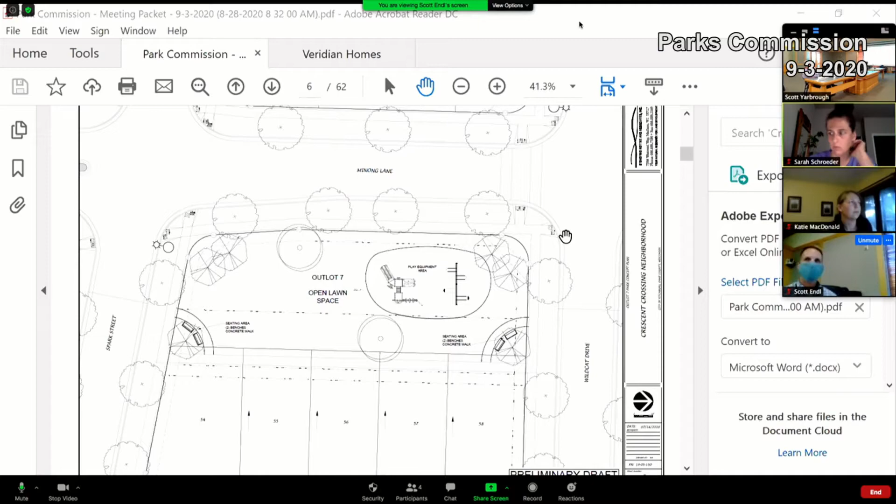Here's what we've got proposed for the play equipment. It says it's for 5 to 12-year-olds, but we asked them to put something in there to address the younger kids too. So we've got 2 different size slides, some different size climbing apparatus to really go towards that target client for the entry-level homes. We've got 4 swings, 2 for the older kids and 2 for the younger kids.

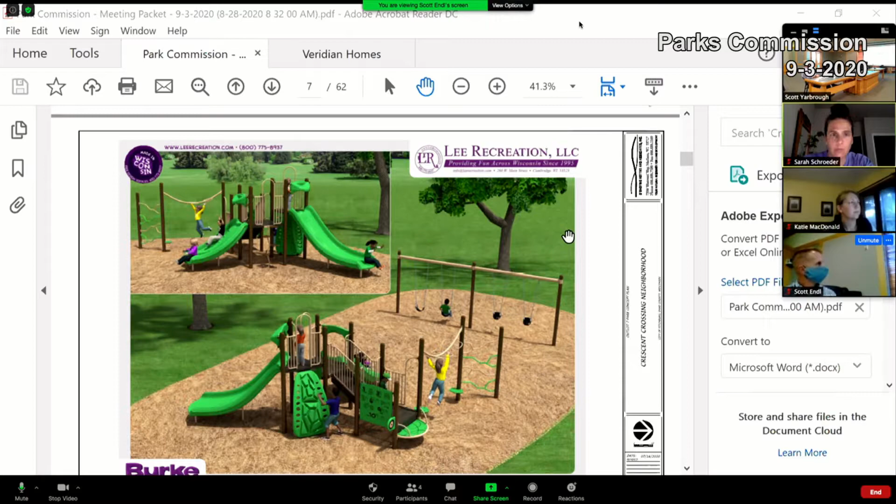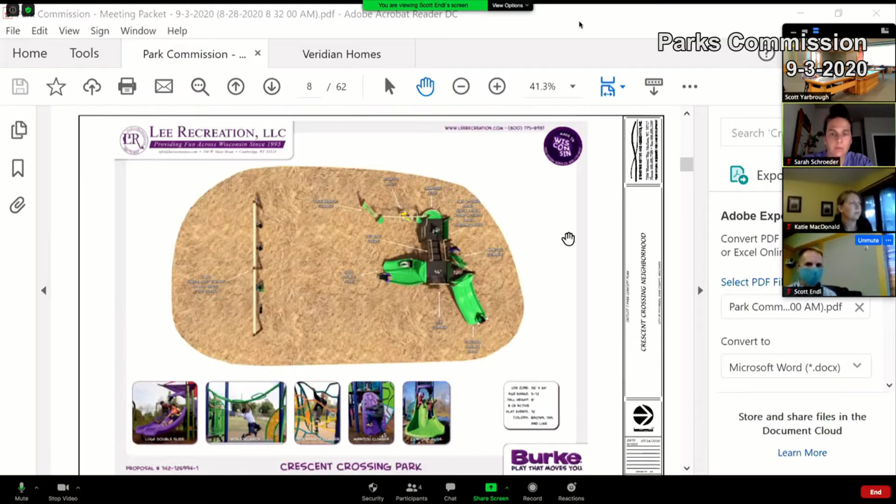Here's a plan view of it, as well as some pictures. Not quite the same colors, but it gives you a feel for what we're looking at for the playground equipment.

So looking at the dog park, we're looking at about an acre's worth of land. 1/3 of it would be for a small dog area, and 2/3 for a large dog area. Around the perimeter, we've got landscaping to screen the north and south neighbors, so they don't have to always see what's going on in the dog park area.

For perimeter fence, we've got a 4-foot vinyl coated fence. And then we've got some amenities planned in here, so it wouldn't be your typical dog park where it's just open land. There would be some play things for the dogs, and also some amenities for the people who have their dogs in there.

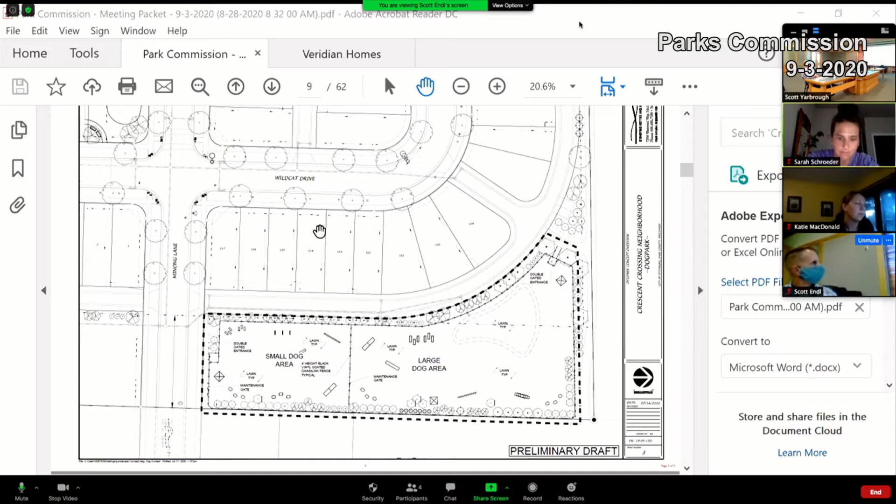So at the entry, we've got this double-gated sally port, where in the front we'd have some signage for small dogs. They go through that sally port, and right away we'd have seating amenities in the shade, so you'd have a bench with some type of shade structure, plus disposal receptacles so that we're taking care of the bad stuff that dogs bring.

Getting into some of these dog amenities, we've got some boulders, which do dual purpose. The dogs can climb on them, jump from boulder to boulder, but it also offers another seating amenity for the people that are in there. We've got a pre-manufactured climbing ramp that would go in here, so dogs can climb on or go underneath.

Up here, for agility, we've got some dog hurdles, and also a balance beam that could be put in, plus reusing some tractor or loader tires, again for climbing or going underneath. And then in the middle, we've got a tunnel, which would basically be a storm pipe that's buried, and the dogs can play underneath there and also go up over the top of it.

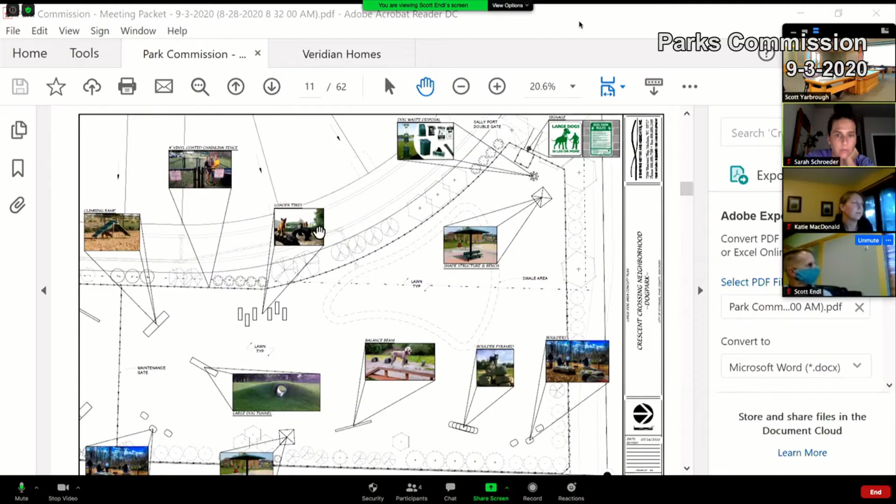In the large dog park, we've got some of the same elements, but at a bigger scale. So we'd have that balance beam again, probably a little bit bigger, and the storm pipe would be bigger, so they'd have a tunnel to go through and also climb over the top of it. We've got our boulders again, so they can jump from boulder to boulder.

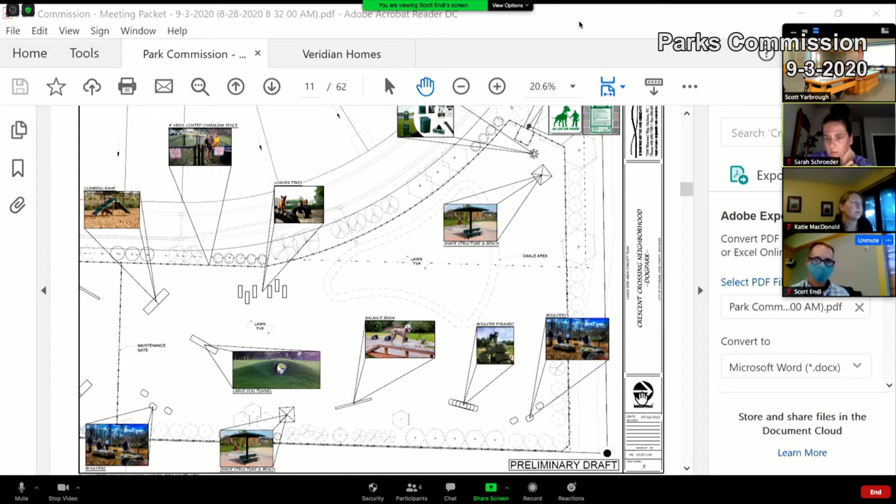Another seating amenity for the people, as well as 2 areas for benches and shade. One difference between the two here, we've got a boulder pyramid, which would be stacked boulders, about 4-foot boulders by 2 foot high into a pyramid, again another climbing and seating amenity. Up here is our double gated sally port with a sign for large dogs, and then we've got another waste receptacle here.

I think that covers it. I'll hand it over to Dan.

So what we're looking at is we've done some cost estimates for those 2 parks or 2 areas, totaling about $178,000 total between the two of them. That does not include any grading or seeding. That is all the improvements above ground, at ground and above.

What we're proposing is twofold. First, a reduction in our parkland dedication fee, basically equal to the area being used for the dog park and open space. Those 2 areas between outlot 7 and outlot 11 total about 55,000 square feet, or equivalent to about 19 units of park dedication fee, which would reduce the park dedication fee by about $82,000.

The other aspect we'd be requesting is the elimination of the park improvement fees for this plat, about $61,000. In total, that would reduce the fees by $143,000, which is still less than what we're putting in of the $178,000. The city would still be getting fees in lieu of for park dedication, $424,000 for this plat. So there's still a significant amount of dollars that Veridian would be writing out a check for, the Parkland dedication fee in lieu of, for the difference between 19 units and the total units for the plat.

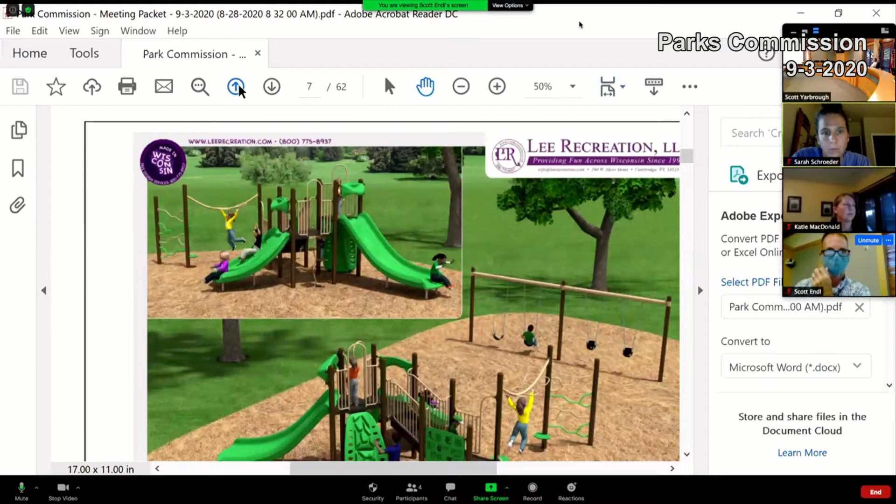Is that north half of it there, is that what you're currently working on? Is that like phase one of this area? Yeah, that's phase one. And there'll be three phases. So we would like to get this going, at least get the grass seed down this fall, so we have good grass growing up in the spring out here. That's our goal, so that's why we highlighted this section for it right now.

I'm not sure if I heard the details of what you said. Are the streets in this phase one, but the whole south part there is still open field, or what stage is this at right now? South is actually to the left. Yeah, that's south, right? Yes, that's south. And that's gonna be the solar farm, the O'Brien farm. Oh no, I don't mean across Lacy, I mean Spark Street East and Wildcat Drive.

So this area here is farmed right now. The stormwater management, that's what I mean, are improved on both sides. And this area up here, Matt, this area here, completing the streets and the utilities right now. We're probably gonna be paving in the next week or so. Right, that was my question. So there's not any housing starts in here just yet. Nope, not for another month or so.

Okay, then about the power line there, where the stormwater management and the dog parks, the two dog parks side by side, small and large, are proposed, that's underneath the power line. So who owns the land, and is there a lease on it from owner to user? It's owned by Veridian, but will be moved over to the association in time. But there's an easement over top to ATC for the power lines, and we have met with ATC, made sure they're good with it. Yes, we did talk to ATC about it.

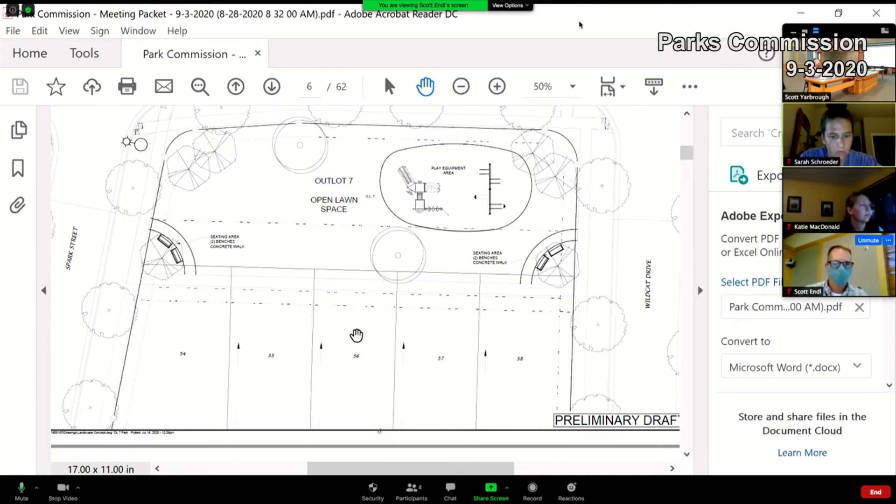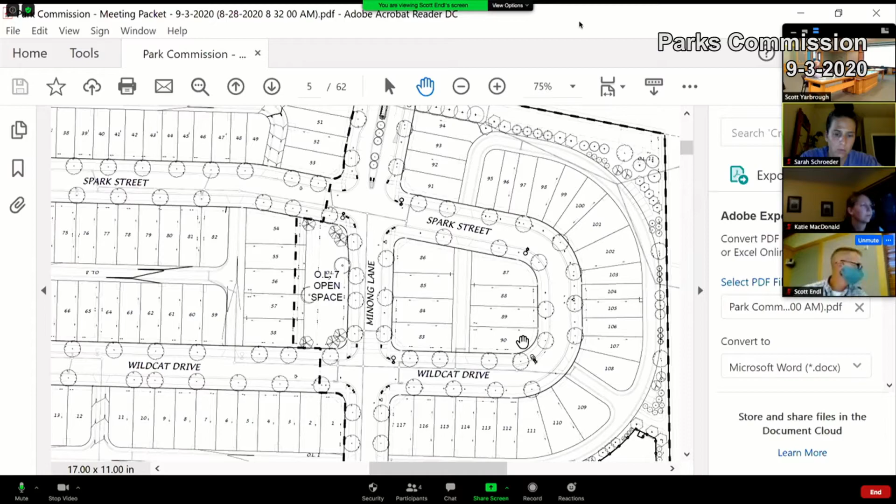Correct. So there's 5 lines going east-west along the north end of those properties. What are all of those 5 lines? Where's the property line? Are they easement lines? What are all those lines? So those are what we call green fronting lots. The front doors actually go out to a sidewalk that moves right up through here. So the sidewalk goes right here, the next page would be better, I think.

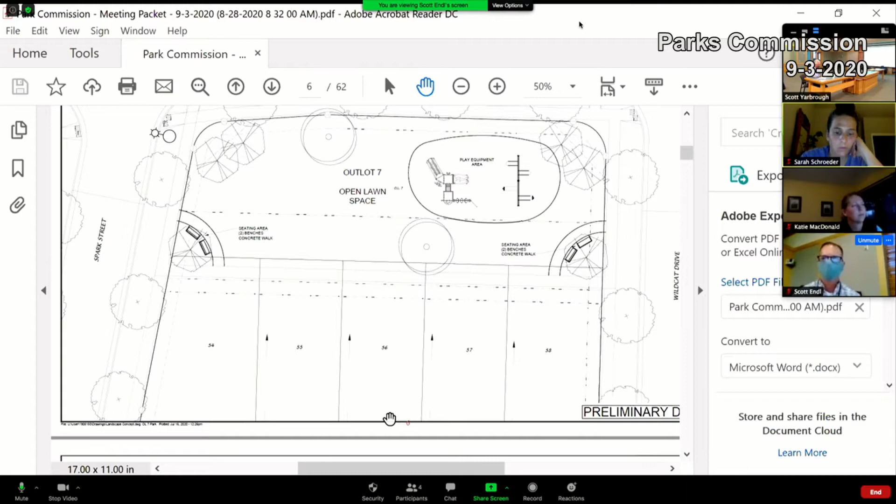So that kind of alleviates one concern that I had about properties that would be right up to the park boundary, but that's their front door, and there's a sidewalk out in front of the house, so that's kind of a good division between the private property, and then across the sidewalk is this park. We've done this numerous places in the last 20 years. It actually ends up being a very neat feature for these homeowners, because you'll see the homeowner sitting on the porch while their kids are out playing in the park.

I'm going to pause and see if anyone else has any other questions. Okay, go on, sir. Hi, can you get closer?

Yes, I shall. I'm just assuming that the city staff and council verifies the numbers that are provided, the financials, because we're not prepared here to say well all those numbers are accurate or are going to turn out to be fair. I would suspect Scott's checked them already, or he will be very closely. Yeah, the city administrator, others.

And now the dog park is in exchange for what might have been prairie. In the other developments surrounding it, underneath the power easement and the other developments, did they put any prairie in, or is it all parking lots? It's stormwater. It was stormwater basins. And then that's really it, it's all stormwater, the church and the neighborhood.

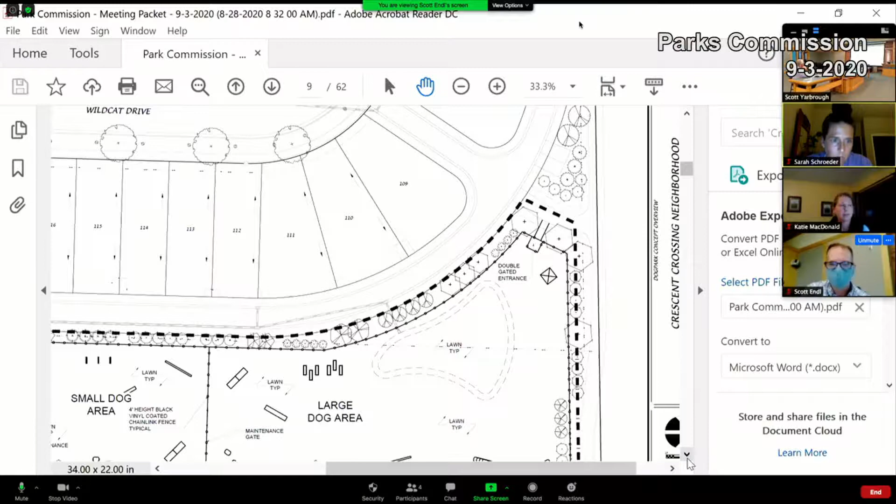So that is a low point in there, and that's where that pipe is that Dan mentioned, taking the stormwater out and to the southwest. Okay, I imagine you have to get the water out of there somewhere. I just wonder if that would be...

I've seen what dogs will do to muddy lawns, so I just wonder if that doesn't drain as well as we might want it to, if that would become a maintenance headache. That's something we can look into. That's all I have for questions.

Is that it? Oh, I'm sorry, go ahead Patrick. Okay, again about the water sources in the two dog parks, small and large, and even the small park in the middle here, I would suggest giving more serious thought to some kind of water source there. I am presuming that in the small people park in the center of the neighborhood, you don't have any water source there either, no drinking fountain. No, we had not planned a drinking fountain there whatsoever.

Okay, are the curbs and gutters and everything the same there as around the dog park area? Yeah. I really don't want to do that—drinking fountains are expensive, expensive to maintain, and there's issues with people, so I would try to avoid that in that park. Yeah, there are some city parks that don't have drinking fountains, but as far as the dog park, I think that needs a little more emphasis.

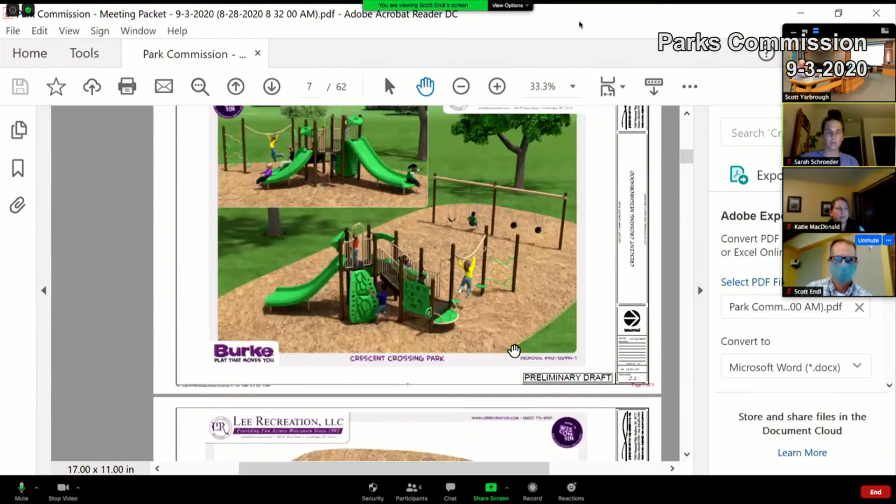One thing I would disagree about here, about the use of this dog park - this looks very interesting, you've got an obstacle course for dogs in there. I can see this being a draw to more than your Crescent Crossing or even North Stoner Prairie neighborhood, because the existing dog park is far south and way over east at Fish Hatchery and Irish. Anyone in the whole northern part of the city might want to stop in here, so it may be more popular than you're thinking, where you're thinking of just this neighborhood walking there.

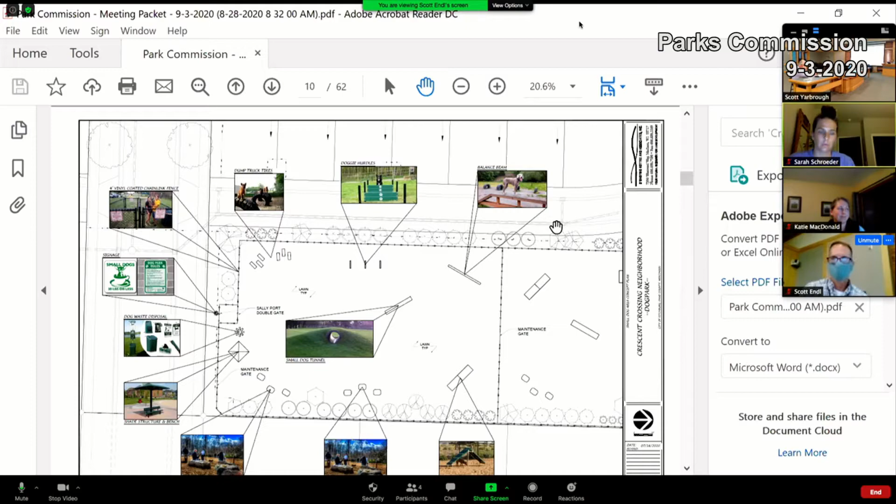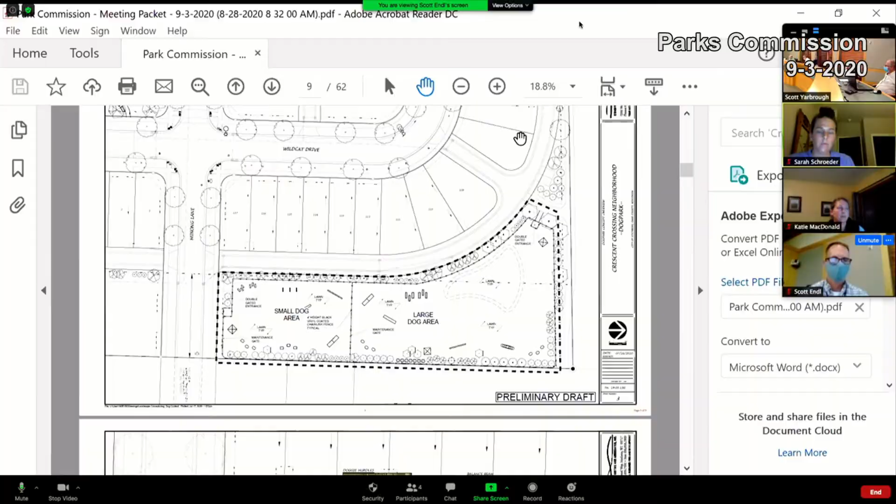I am also a little concerned on a couple things here. There's Minong Lane at the south end of the Small Dog area, and Wildcat Drive is the western border of this. Since Minong Lane going east and west is a main road through here, because if I remember right the Plan Commission kind of overruled the intended original difficult way to get through the neighborhood, and now you've got a straight east-west so traffic doesn't have to go round and round the blocks to get from here to there.

Does Minong Lane probably not allow parking along it? No, I believe there's parking on there. Okay, and it was always in the neighborhood plan. This follows the road alignment - it actually comes through and connects to the adjacent neighborhood.

I'm just remembering there was an early version where if you come in from Seminole, you come up and then have to go way around a block to get through to the east and all. Yeah, I think that was on the Stoner Prairie site. We'd never really proposed that here. Okay, I know this will go through a lot of iterations, right? Yeah, okay.

And so Wildcat Drive would also allow parking along there? Yes. Okay, I can really see cars driving in and parking here to use this, from anywhere on the north side of the city, or anyone who wants to use an obstacle course, because that kind of feature doesn't exist at the Irish Lane dog park. So I think this could be more popular than you think - it's only the second one in the city.

I do have a concern also. The entrance to the large dog area is way up there to the northwest - that's not bad. The entrance to the small dog area, though, is on Minong Lane, which I would assume to be the heavier traffic road going east and west through there. So that doesn't look like the best place to me to have the entrance in and out, when people have to go in and out and then get to their cars or even just walk home. I think it would be better if it was on Wildcat on the west side.

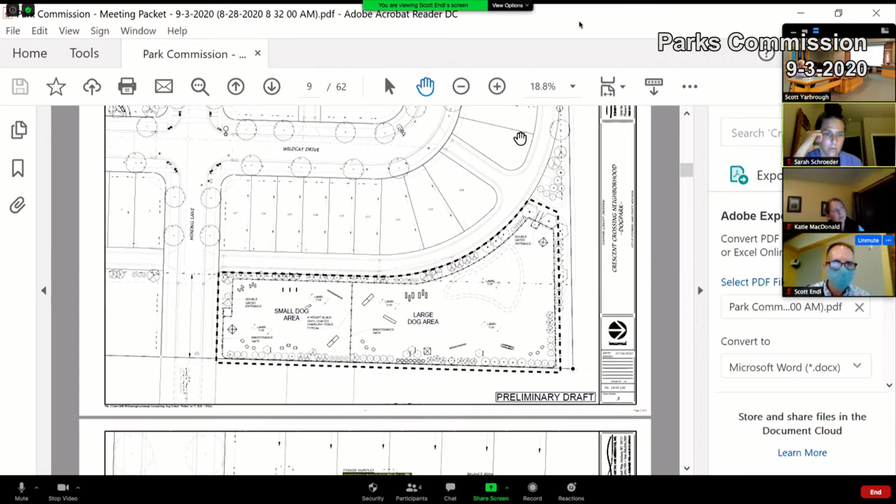Well, again, I'm trying to deter people from being lazy and driving here - I want them to walk here. This is an area where we've got 250 homes surrounding it, and these home sites are a little tighter than what was built in Fitchburg 20 years ago, so it's not as spread out. You've got more density, and you want people to walk to places - to Hop House, to the church, to the dog park. That's what we're trying to promote here. So yeah, if they want to drive, they can.

They can park on the road, on either of the roads if they want to. But the goal is that people in Crescent Crossing, North Stoner Prairie, Lacey and Seminole can all walk to this dog park, and that demographic serves a number of houses. There's more room, I think, than you realize. We're connecting to the sidewalk too, so the sidewalk will take you right to the entrance, won't it? Yeah, there's sidewalk on that north side of the roadway.

So it'll be pedestrian connected to the whole neighborhood here and also over here to Stoner Prairie. And then over here, there's a trail that runs east-west along the north side of our property, abutting Blackhawk Church, and then there's a trail that comes into here, which is where that comes off of.

So it's really truly meant for pedestrian, but I understand what you're saying, that it may be popular with people other than here. I'm not disagreeing that people from this neighborhood will walk here. I think that's fine, and I wouldn't want to do anything to deter them from walking. But someone from the houses way down on the south end driving over here, that is kind of lazy.

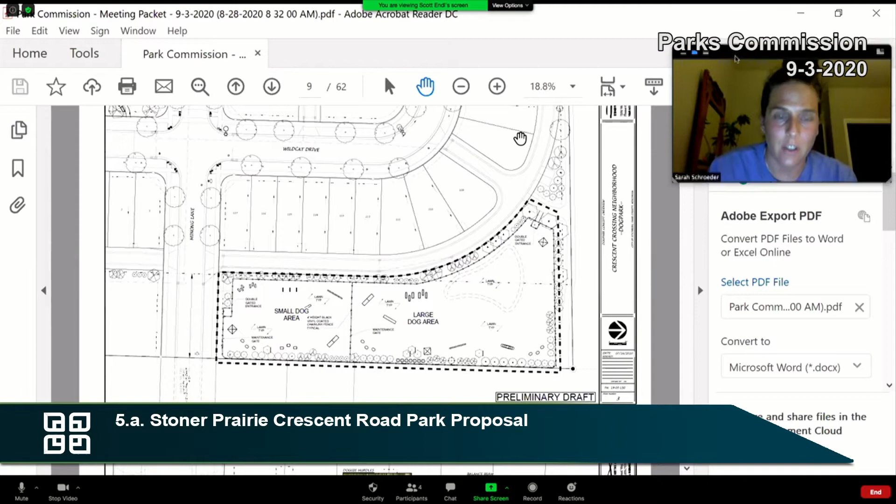And then for this communication specifically, I think, Scott, you sounded favorable for this. So I think you're our expert for how park funds work and how we can best keep our parks maintained. So I'd love to just confirm — am I hearing you correctly, Scott, that in your opinion this is a wise choice? It's something new, it's something we have in our plan that we should explore. So am I understanding correctly that you think it makes sense?

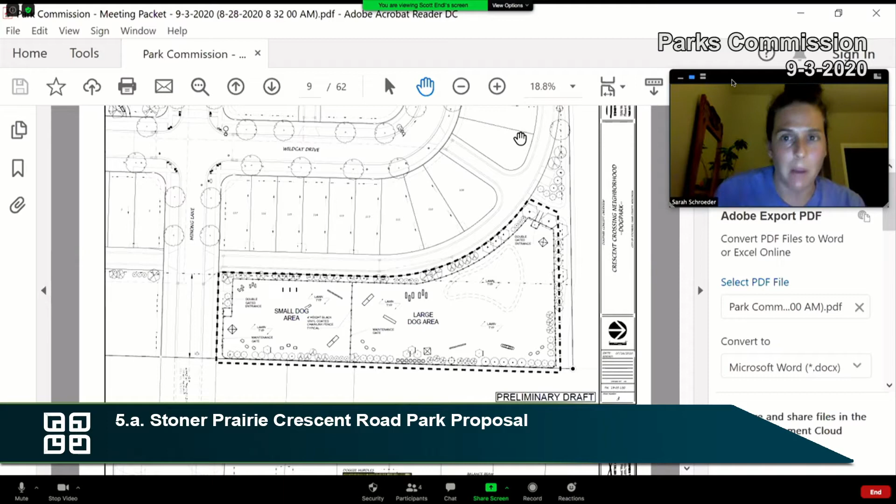It does, Sarah, and to me too — typically when we design a park, what do we always do? We always go to the neighborhood and ask for their feedback on what they would like to see in their park. And I would suspect that these gentlemen, in their development, this is what they're hearing from their customers, so they're willing to invest dollars to build it for their customers. So for us to decide, from my perspective, it's really most successful when the neighborhood drives it, and we need that help in deciding what the neighborhood wants in their park. The experts in the design, function, and amenities included in these parks really come from the development and the residents who are going to be living there.

I would echo both of those comments. We don't want to penalize them for putting in too good of an amenity, and that's kind of what I feel like we're sort of getting at here.

The parking is limited, but I would not want to give up anything else for more parking, certainly. I think people will walk to it. If people are going to drive with their dog, they'll go to a dog park that has parking, so this one isn't going to encourage driving to it. As for its size, I don't have any problems with that.

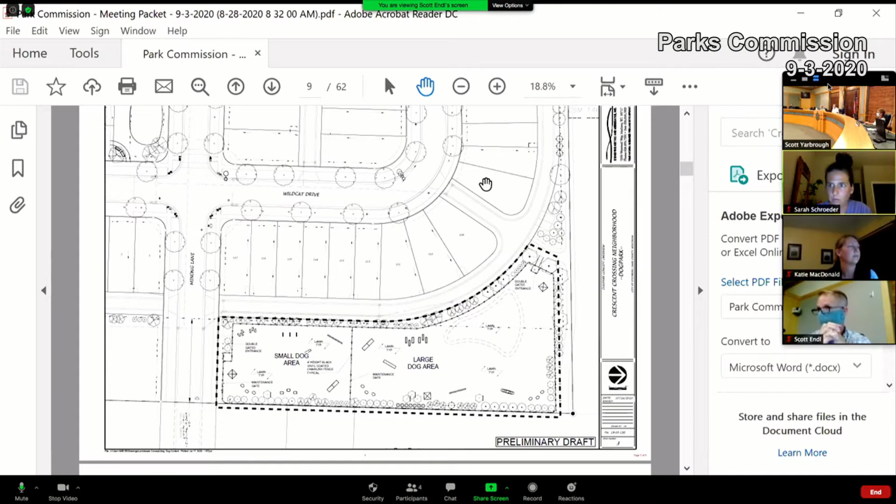There are ways to get there without having to walk on Lacy Road, if you want to take your dog on a long walk and check out that park. So I don't think there's any impediment to getting there on foot. The bike path will actually connect all the way through to the bike path that runs north all the way through Seminole Forest, through Seminole Glen to Seminole Pool. So a whole lot of area, those neighborhoods can connect via the path.

I would also point out that Blackhawk Church is just to the north of this, and there may be dual use of their parking lot along the pathway. Oh, that's a good idea. That's a very good idea.

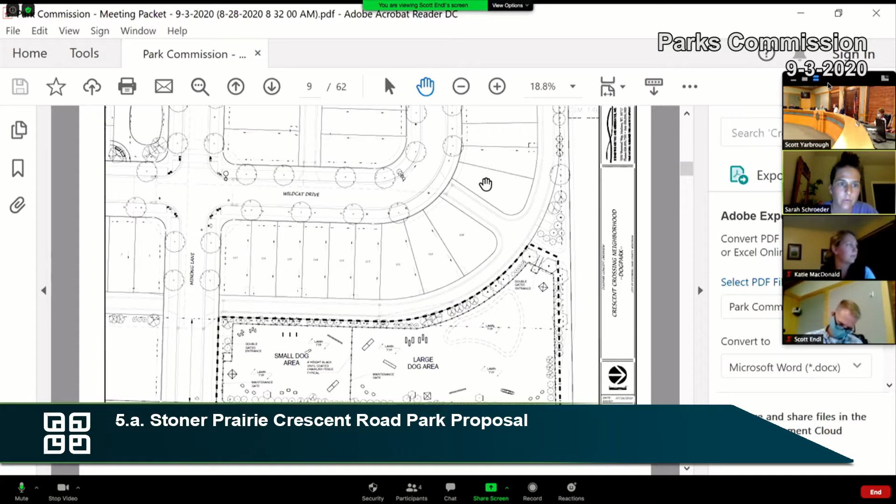Okay, do we have a motion? I'd make a motion to support what's being proposed and to research this further. Is there a second? Second. Any further discussion on the motion? Hearing none, voting on the motion, all those in favor signify by saying aye. Aye. All those opposed? Motion carried. Thank you, guys. Thank you very much, appreciate your time this evening.

All right, resolution R-145 authorizing acceptance of construction bid for pickleball courts at McGaw Park. Scott?

This is one of the final steps to get the construction of the pickleball courts at McGaw Park.

I would maybe just summarize the timetable. There was an addendum to this contract, so the timetable has changed a little bit because, as you recall, there is a water loop that needs to go in first. So we wouldn't have enough time to get this excavated, graded, and paved by the end of the year. So we did an addendum so the project will get graded and excavated and ready, but then they'll pave in the spring with substantial completion June 1, and the project will need to be completely done by July 1 of 2021.

What's nice about that too is it'll allow the base to settle over the winter, and if we need to fill in some areas, that'll allow for that opportunity.

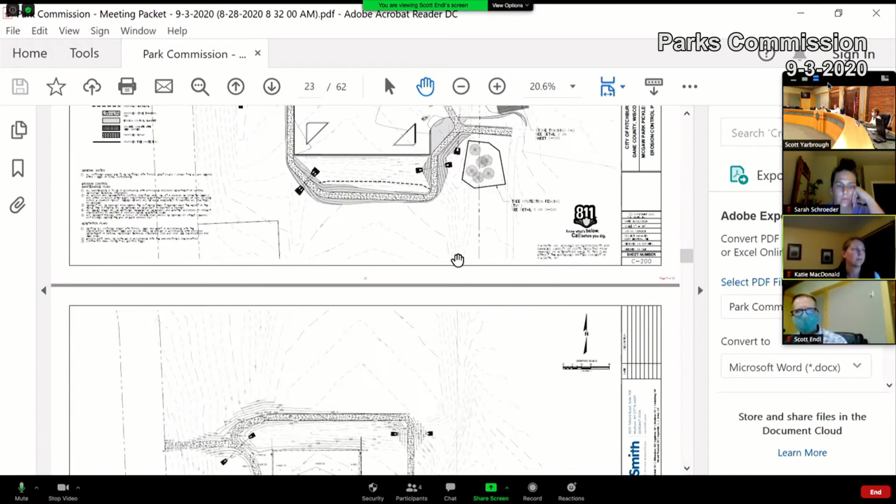I did include in your packet the pre-approval, which has the different funding sources, and the bid document, which gives you the design and the look of it. You can see it on the page that's showing now.

You see the culverts because you see all the topo lines on the north and south side, that's where the ditches are. So these paths will actually go into the southern athletic field and the northern athletic field, just for a bit of clarification.

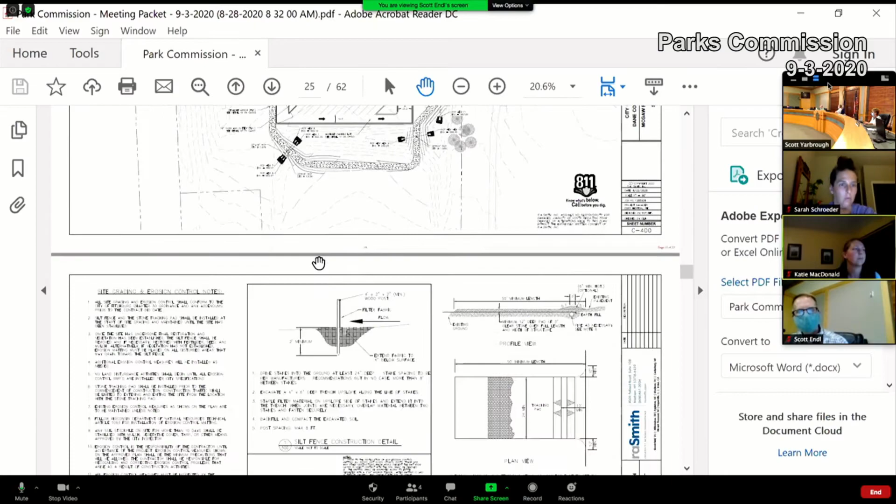I also wanted to include this bid tab. We received three proposals, and R.A. Smith is recommending Joe Daniels for $548,282. Here's the bid forms and things that were included in the packet for the council.

I also wanted to reiterate the funding for this. I can certainly explain that again if you need me to, but I wanted to provide a summary of both R12220, which was the water project, along with the pickleball courts, so everybody knows the funding and where the funding sources are coming from.

I also included the McGaw Park Master Plan. When we did this back in 2012, we were anticipating that we'd get some additional parkland to the west, and it calls for athletic fields on the north and south, with amenities in the middle.

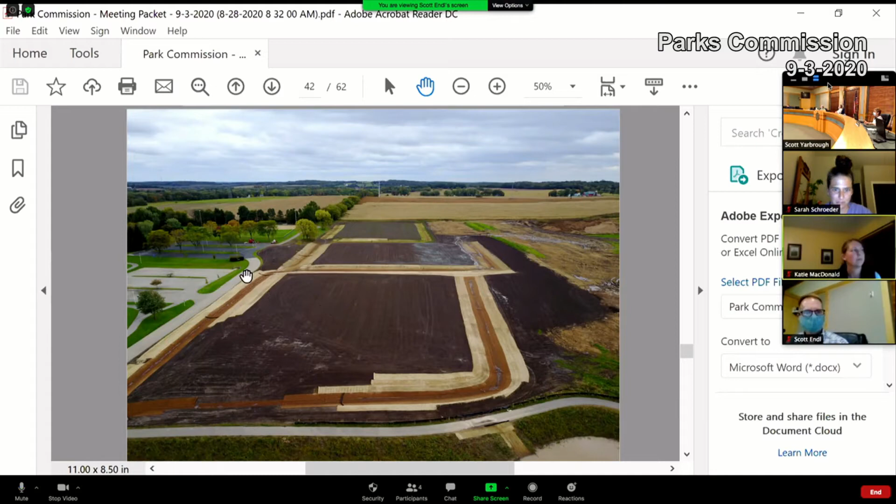I also included an aerial view so it gives you an idea: you come in here, then there, then the parking lot, and then the pickleball courts. There'll be a culvert here because the path will go along here and back up, and it'll do the same thing on top, so there's access to both the north and south playfields.

Are we looking east? We are looking south. Existing McGaw Park is over here to the east, and the houses and things are over here. So you'll come up the access road, come in here, then the pickleball courts, then the parking lot. The path will come over this, then on this side and up, and do the same thing on the other side.

Is that part nearest us also part of the park, or is that the other side of the path? Yep, that's part of McGaw right here. This is a stormwater facility, the brown section is the drainage swale. But the property adjacent to that greenway, is that also part of the park? There are some homes over here, and I think part of this is the park too, on the west side. The swale at the bottom there, to the north, is owned by the Crossing condominiums. There's some ponds there first, those would be city-owned, and a little farther off the picture, downwards, that's privately owned, but where the two ponds are, that is city-owned property.

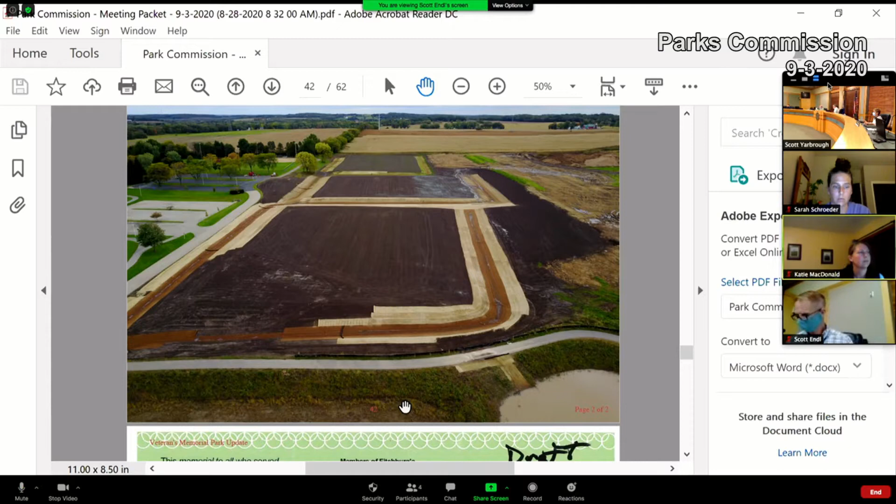So there you have it.

Patrick, as far as the construction timeline, when I read through the packet information here, I was looking for some of these dates you've given us in the addendum. I had some questions. The timeline says the contractor may choose a construction start date, however, must complete within 45 calendar days, no later than November 15th. So is there an intended start to actual work here?

We're anticipating, if all goes well, an authorization to begin around September 22nd. But that means we've got to get approved by the Common Council on the 8th, and then we've got to get contracts and insurances and all of those kinds of things. Right, that's what we're hoping for.

So with those city approvals and those steps being completed, then September 22nd is approximately the date when the contractor could start working? Authorization to proceed, correct.

Right, and then they're supposed to finish the grading, complete the grading, by November 15th. And then in the spring, what date would they start the rest of the work? That's up to them, but they would need to have it substantially paved by June 1st. Right, I got that. And then completely paved and, what do I want to say, renovated and all of that by July 1st. Right, I got that too.

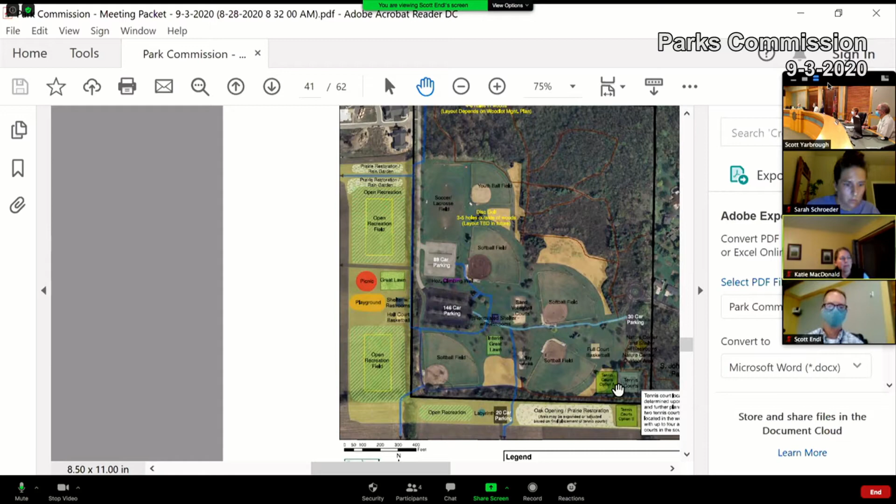One of the points about the master plan is that this western addition, as I like to call it, was privately owned. It was either a cornfield or a soybean field at the time of this master plan. So how much serious work do you put into planning something 10 or 18 years into the future, when it is currently privately owned at the time that this master plan is worked out?

Well, I don't want to get way off course here, because to me the pickleball courts have already been decided on in previous meetings. It's just a matter of approving the contract to build it. That's what we're looking at now with Resolution R4520.

Mark, I don't know if you received any emails, but I did receive two emails from residents supporting this project, just to let that be known. Also, for some background, we discussed this in Works, and it was actually a tie in Works, 2-2, and the commission talked about how popular pickleball is and how there's no disputing that it would be a busy park, especially with our current situation of outdoor activities being really valued. The only reason the vote came down to 2-2 is there were some concerns brought up about the optics of spending right now, being in a pandemic, and where finances are being prioritized.

And Scott, thank you for breaking that down, because I think that's really helpful, showing the park improvement fees and addressing that concern. The other topic brought up is just accessibility and the ease of how individuals could get to McGaw, as potentially not being the most accessible park. But without a doubt, the vote came down to 2-2, just that there's no dispute of the popularity of pickleball and outdoor activities being really valued. And just as a call out, the two residents that emailed in support said that they would use the facilities and are excited about the addition to the park.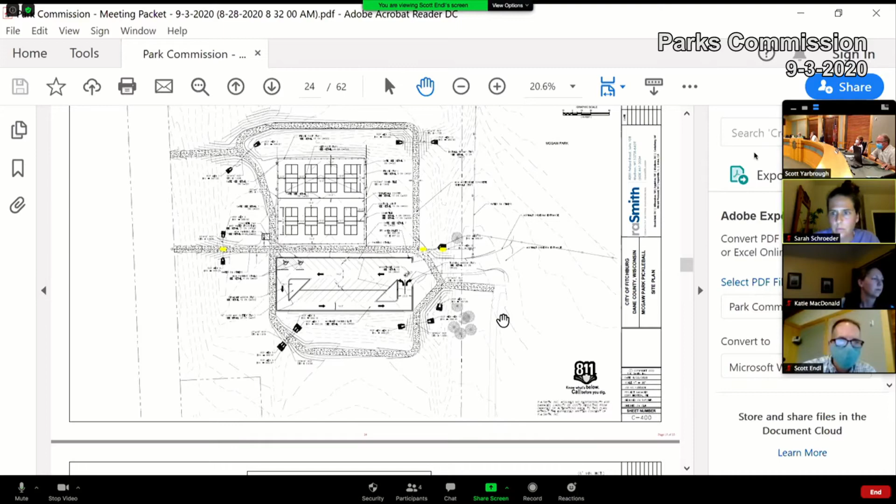One of the things I'm thinking about is the pickleball court area, the 8 courts. They look to me like they're pushed to the north as far as possible. Outside of that fence, it looks like you can't walk around the outside at the north end because you'll fall into a ditch, which means there's no room for greenery, arborvitaes, trees, or plantings, because it's pushed so far north. My idea is the pickleball court area could be farther south a little, to leave another 10, 15, 20 feet on the north edge for some greenery, or maybe a path around there. In McKee Park, around the tennis court complex, there's a path that goes all the way around the east side of the tennis courts.

I have a question. We can't change anything about the way it's designed, correct? We're only allowed to talk about the proposal, the bid, accept the bid and move it up the chain. Is that how it's stated on our agenda? Well, it's a significant change to deduct the parking lot to the point where they'd have to rebid.

Right, and that's not being sent to us to do, correct. So we really should, I think, just restrict ourselves, as much as I probably agree with many of your ideas, but it's too late. Well, I would argue that, okay, we just had Chris Ehlers Associates in here. At the very beginning, the preliminary stage, it hasn't even been officially referred to us, just the original concept. This never went that way, which I have a strong objection to.

But it did follow a plan, and the council is correct on this, Sarah? The council's voted on this plan, this is done. This was part of the CIP, yes. The plan was voted on. I mean, and that's what I'm trying to verify, so that we don't continue to talk about those same details that we can't change, Patrick.

Well, this is up for a vote by us, and the options are yes or no. Let's put something on the table then, so we have something to follow. Either approve resolution 14520 or amend it. I'd make a motion to approve the resolution, that's what we're here to approve. I'll second. Who made the motion? All right, and you seconded, Susan? Okay, discussion on the motion.

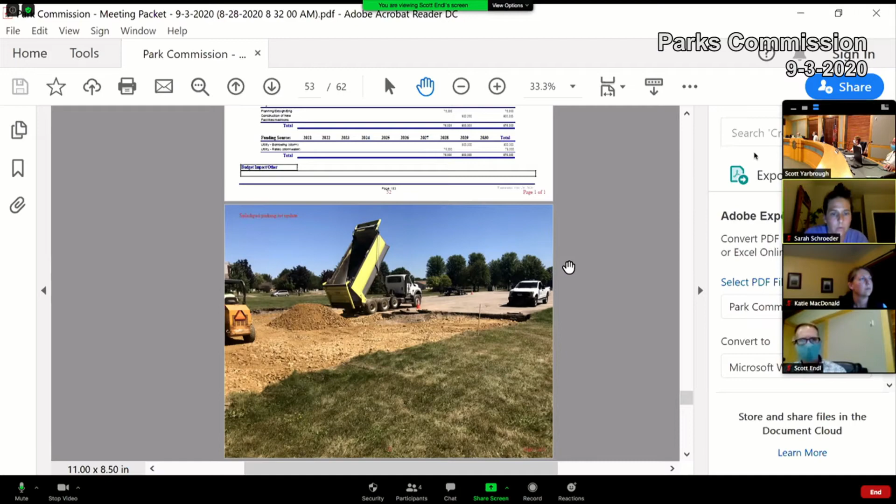Here, they're working on the Public Works crew - they basically will put together the base for the additional parking lot here at the splash pad. So this is the additional work they're doing there. And then I also wanted to report that we were able to get a contractor to do the Wildwood Park shelter roof repair. So that's a pre-approval for that, because I know there's been interest in that.

And then we have our staff reports. And I do have a couple future agenda items. I know there was talk about updating the park and open space plan - you're going kind of fast through there.

Oh, okay, I'm sorry.

I do have a comment about the Seminole Glen project that's listed for, what do we say, 2028? I'm reading that correctly, that it's to enlarge the storm sewer underneath Schuman Drive. And that won't do anything to mitigate one major portion of the stormwater issues within the park itself. What it is doing is correcting a problem that was created when North Stoner Prairie neighborhood was developed.

The city - if I'm stating any of this incorrectly, please forgive me, I'm just a citizen who tried to follow it - but North Stoner Prairie was developed with their own stormwater retention not that long ago. And the plan, in the absence of us having a director of public works, was created to have overflow stormwater in massive rainfall events go out into the street drainage, underground piping, the storm sewer, and there was a gate that would pop open and dump excess water into the kettle.